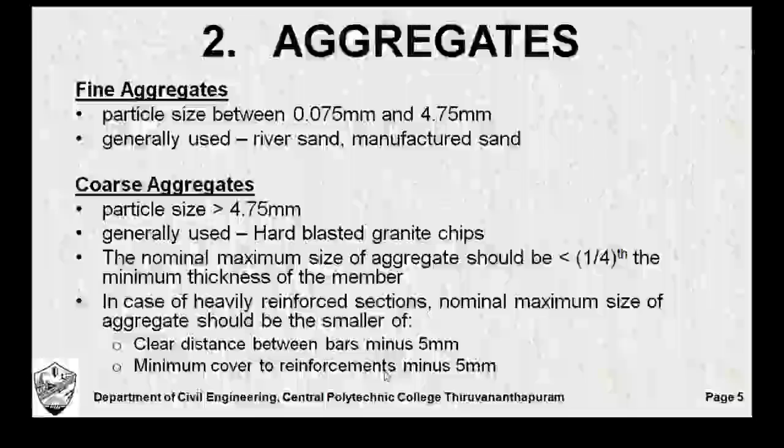Now let's discuss grading of aggregates. Grading is nothing but the particle size distribution of the given aggregate sample. If you have a sample of aggregate, you are determining what all sizes of aggregate are present in that sample, and also how much quantity of each size is present.

So once you perform sieve analysis, you get the details of sieve sizes on which these aggregates get retained, and also how much percentage passes through each sieve. This can be found out from this test, sieve analysis.

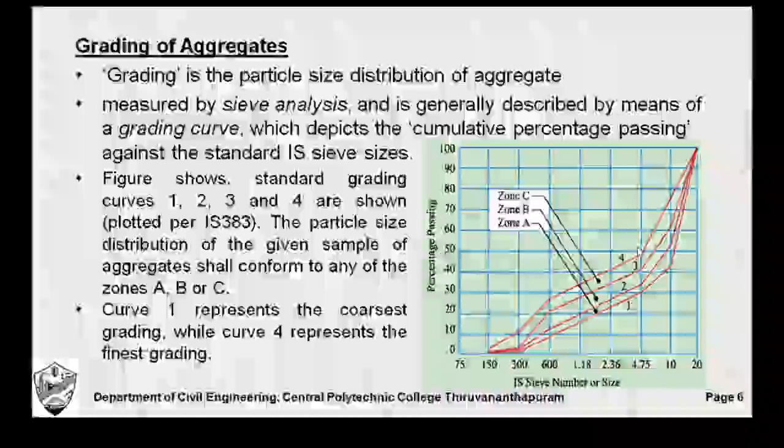So which one do you think is better, having a coarse grading or a fine grading? Effectively, as we already discussed, you need all ranges of particles. The aggregates should not be very large in size, and it should not be always very small in size.

You need all range of particles, not just one kind of particle, because having all ranges of sizes will result in better filling of voids, and it helps to make the concrete more denser. So that is very, very beneficial for concrete.

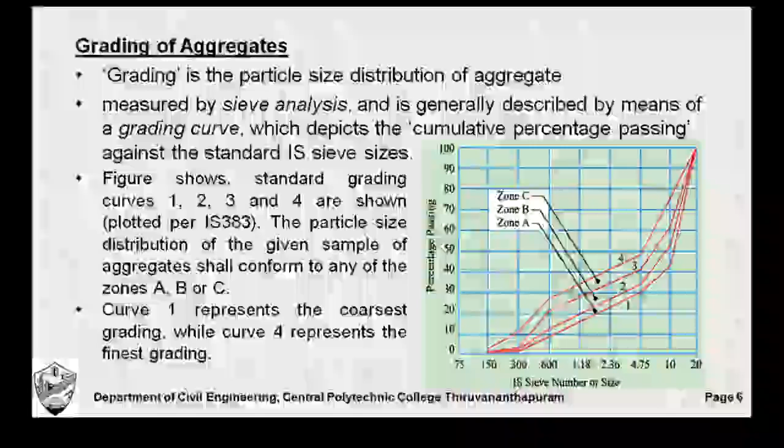So such a sample of aggregate in which you have all the ranges of aggregates in definite proportion, somewhat resembling curve 2 or curve 3, is better, or somewhere in between 2 and 3, or somewhere between 1 and 3, is always better.

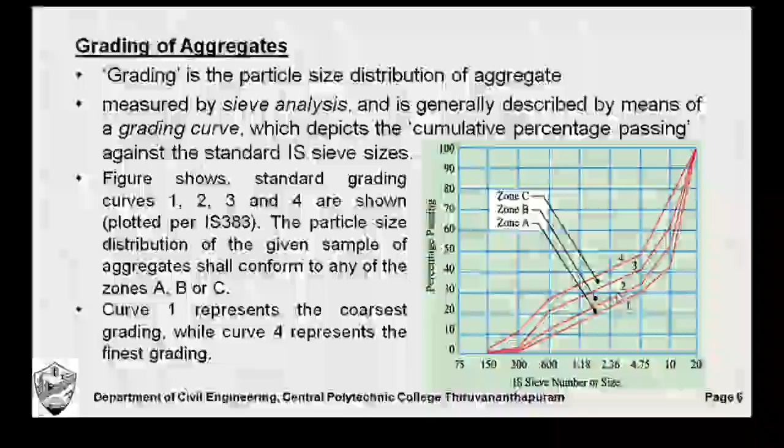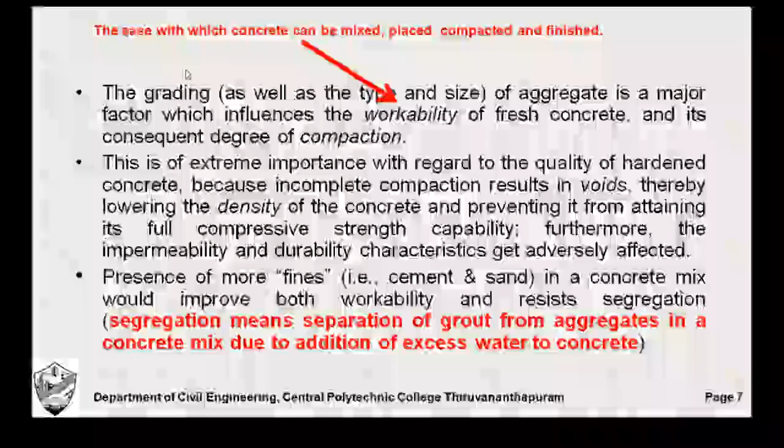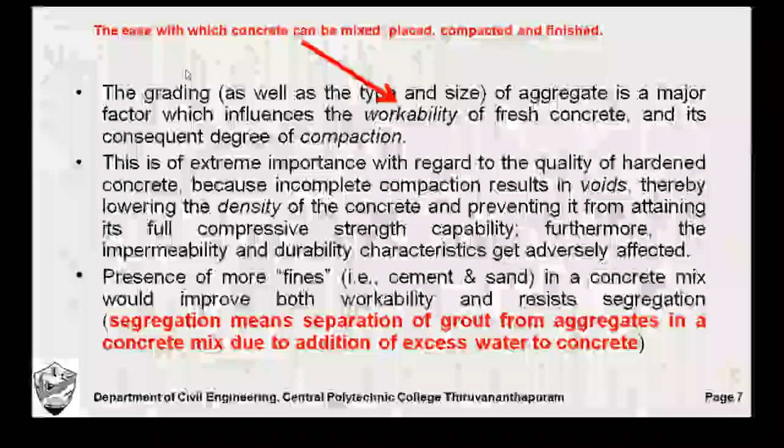You cannot say that the aggregates used in concrete should be of a particular size. No, you should have a continuous range of sizes so that the voids in your concrete mass get eliminated thoroughly. Now, such an aggregate in which you have proper grading or proper range of samples of definite sizes in definite proportion, you call well graded aggregate. So well grading of aggregate is a very important requirement of concrete.

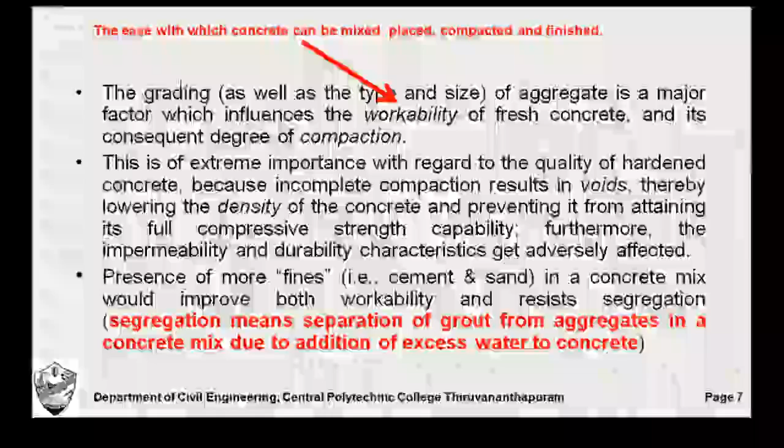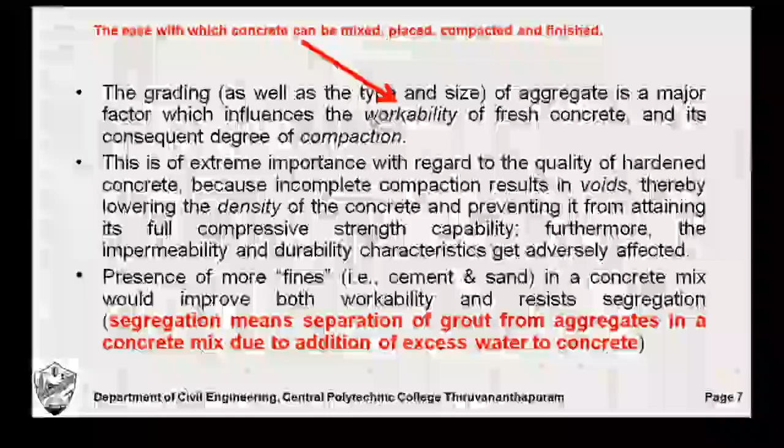Now, having a well graded aggregate can result in so many desirable properties of concrete. It can affect the properties of concrete, about which we shall have a brief discussion. Grading of aggregate can affect the workability of fresh concrete and also the degree of compaction.

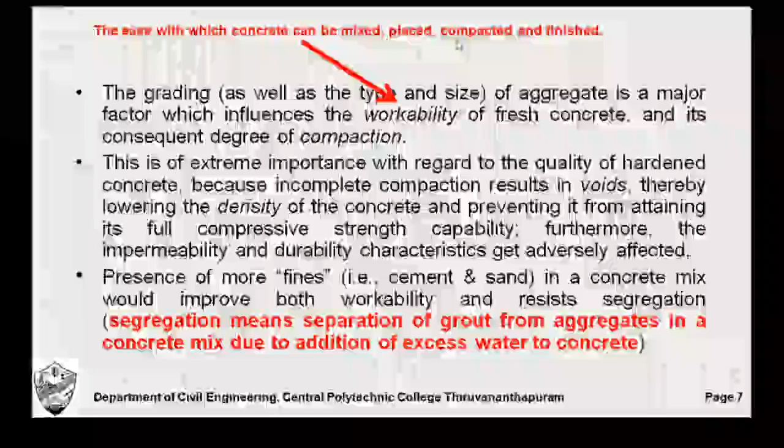What is workability? Workability is the ease with which you can mix, place, compact and finish a concrete mix. So the easiness with which you can work with concrete is represented by what is known as workability, and a good grading shall result in better workability of the concrete.

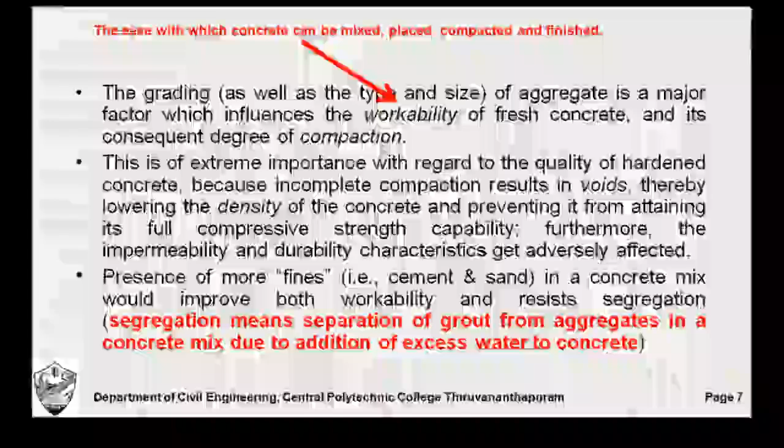Same is the case of compaction. Compaction is done in order to eliminate the air bubbles or air voids present in concrete. So for better compaction, for the easiness with which you can perform compaction, you need good grading.

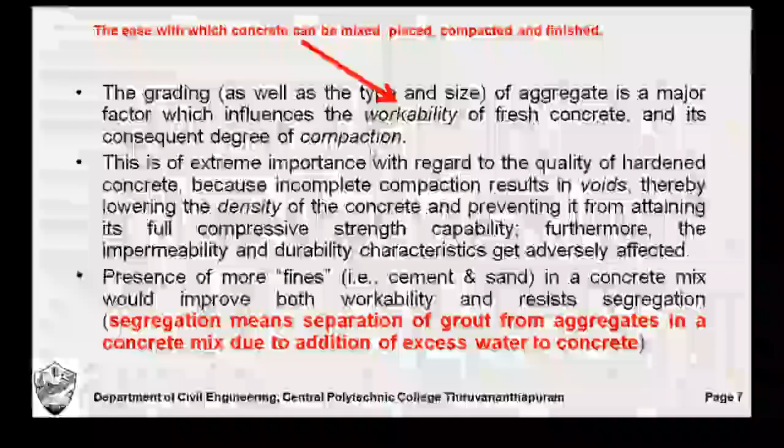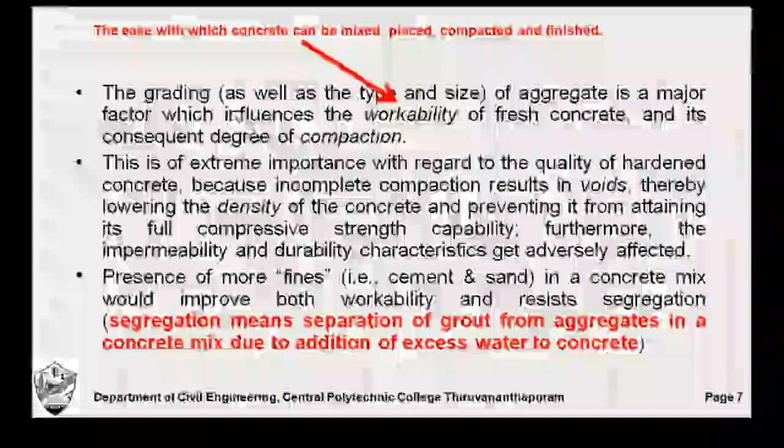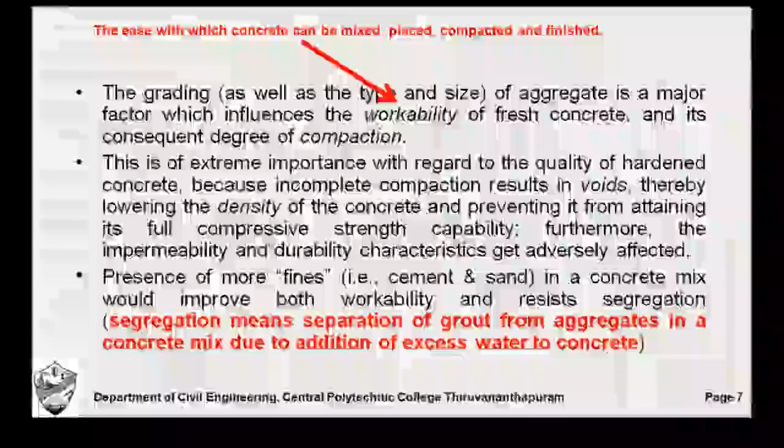Now, there is a great importance of grading with respect to the strength of concrete also. A good grading or well graded aggregates can result in better density of concrete, and hence result in increased compressive strength of concrete. So a well graded aggregate shall result in good compressive strength of concrete also.

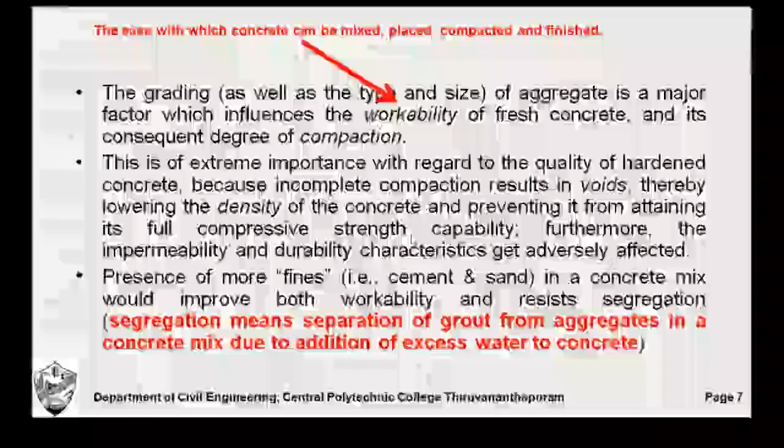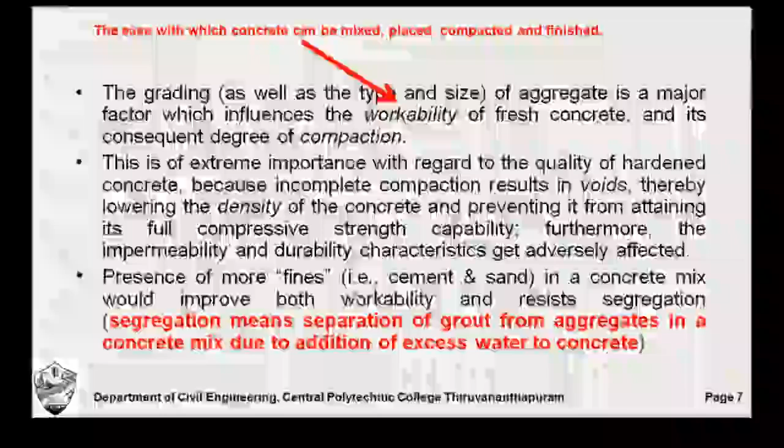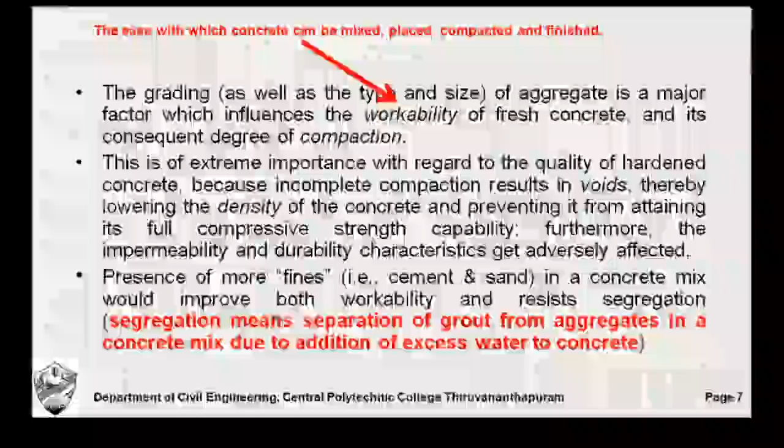Then what about the presence of more fines in concrete? By fines I mean cement and sand, which are the finer particles in concrete. Presence of more fines is also beneficial to concrete to a greater extent. It will help to improve the workability of concrete. It will help to resist segregation also.